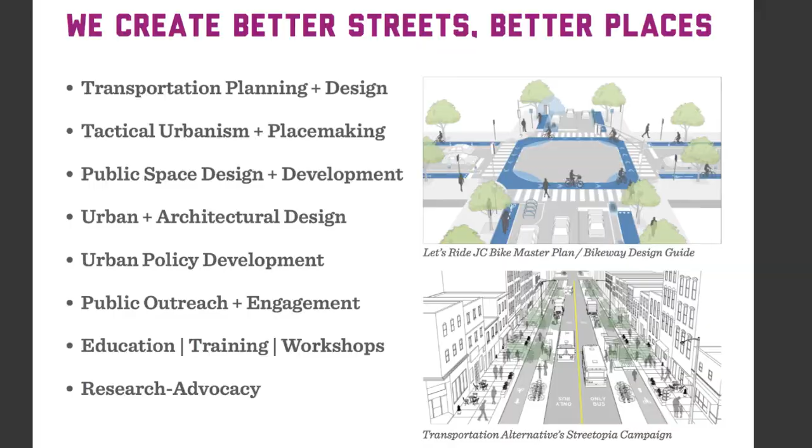Our firm, Street Plans, we are about 9.5 years old now. We have offices in Brooklyn and also in Miami, which is where I started the company with my partner, Tony, who runs our office down there. We do a wide array of project types. We work on cycling and transportation, we work on public spaces, we do zoning and architecture, a lot of research, writing and advocacy. So we're involved with a lot of different kinds of things with many different types of community groups, with foundations, with developer clients, with a lot of mostly city clients. So, we get a lot of different perspectives through our work and through our projects.

I hope you leave this talk this morning with a better understanding of what tactical urbanism is. That's a wonky term, and of course I'm going to explain it more today. I hope you can understand how it can improve the project planning, development, and delivery process. In the end, we're looking to, yes, use short-term projects, but this is about the longer arc of transforming our communities. And then finally, I hope you'll commit to thinking about projects and carry them forward and deepening this practice wherever you can affect change here in Orange County and beyond.

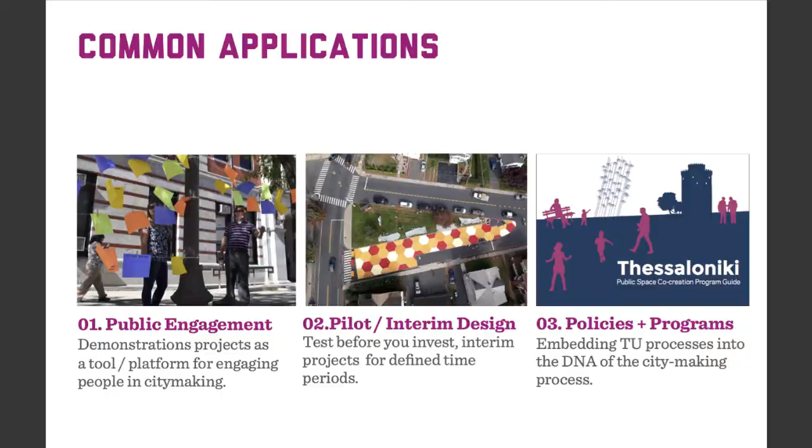Pilot and interim design projects, these are those that are meant to last longer than a few days, but are not meant to be permanent, right? So you want to try something for a little bit longer, really evaluate it in terms of how it's working, what the performance is, getting more feedback from people over a longer period of time. And then finally, policies and programs, as I mentioned. So we're creating these programs with communities around the globe now.

So the benefits are that you encourage people to work together in new ways. It's one thing to be asked to come to a beautiful room like this and listen to a speaker like myself, and then engage in a project, a charrette, a workshop, or what have you. And it's a very different thing to ask people to come out into a neighborhood and physically do something together collectively. That's a very different kind of setting and situation, which we find to be very powerful. We call that experiential engagement.

And then what this does is it helps us uncover what works quickly and, more importantly, what doesn't. So there's kind of a conservative approach built into this where rather than go and spend $100,000 or $1 million or $10 million, let's spend $1,000 or $10,000 first, work out the kinks in a design or a concept, get people to buy into it or not, and find that out quickly and inexpensively before you go and spend 5, 10, 20 years investing in something that in the end may not work.

And then what we're trying to do is deliver public benefit faster. When these projects are successful, we can go very quickly from the very short term to kind of fast track projects because it builds a lot of political will and people can actually see the change and be a part of it. Or in short, this is what we're talking about.

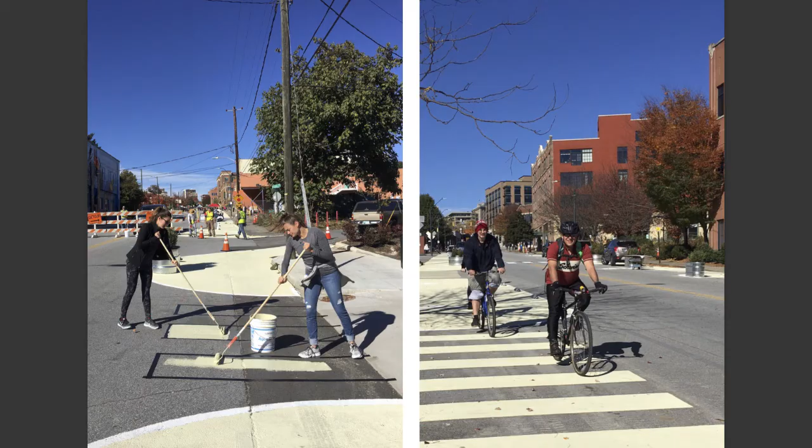We worked with them to get this figured out at scale on an actual urban street. And then the community came out and painted it. So everyone had a chance to really deliver this project, which again, that kind of process tends to be very memorable for people, and people feel ownership over that once it's delivered. And I can talk a lot more about that project if you have questions later.

Number two, start smaller than you think. You may think having a couple $100 may seem like not a lot of money to make a big change, but I'm going to give you a story where that was absolutely the case. This is Hamilton, Ontario. Has anyone been to Hamilton? It's like the Pittsburgh of Canada. It's this old steel city, 500,000 people, fell on really hard times for many decades, but recently has been making a great comeback. And it's in the Greater Toronto region, right on the lake.

And this person that you see literally screwing cones into the asphalt, which I don't recommend, by the way. You get a lot of kickback, but as we say, build, measure, learn. This is Graham McNally, who's an architect in town and relatively young, and he is part of an organization that's called the Society of Architects. And they've been very frustrated. This is back in 2013, by the way.

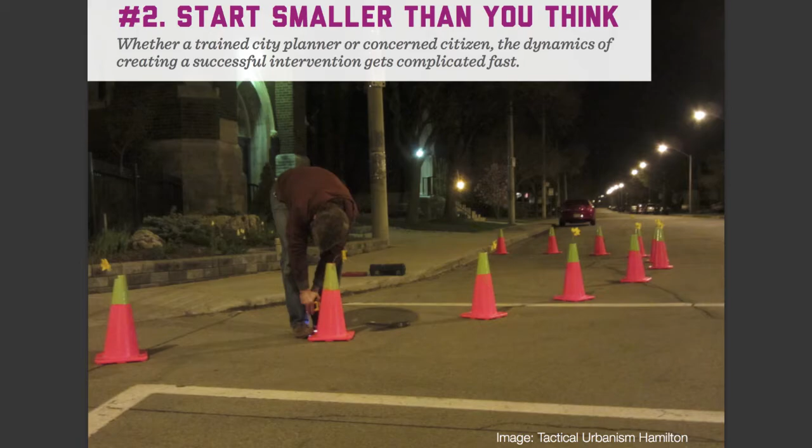We picked intersections such as this, which was made more car-dominated but was in a historic neighborhood, and very walkable downtown streets as well. And this is the result of one of the projects. And so the society gave out these micro grants to 5 ideas that would get developed through our workshop. And they had $5,000 in total funding for the whole thing. And so we thought if we do at least 5, maybe one of them is going to work. So we take lots of little small bets, and maybe one of them is really going to spark.

And that's exactly what happened with this location, which was these cones on one corner in front of the church, and then on the other corner in front of a school. This is a 2-lane, one-way street where, especially at rush hour, when parents are trying to get to work but also drop off their kids, a lot of people speed through the intersection. So it's kind of known to be a dangerous point. When the cones went out, the crossing guard told the press, well, this is fantastic, this is cheap and quick, and it's making a difference for my kids.

We did these 5 projects. I came back to do a talk at a much larger citywide event called Open Doors Hamilton. And at that point, the news media had really picked up on what had happened just about 10 days before. And then once the news article hit, then the city figured out that this stuff was happening, yes, illegally around town. And they were not happy.

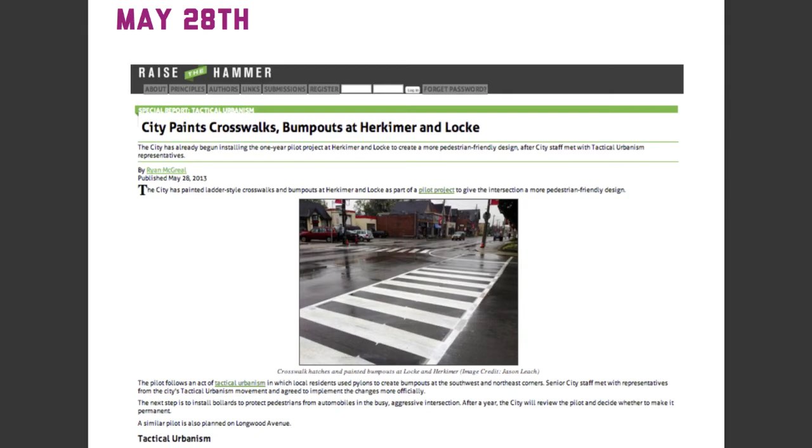And they said, okay, let's start from scratch. Let's rethink this whole situation. Let's take the tense nature out of the conversation and think about how we could actually make this more long-lasting. In 5 days' time, they had gone out to that intersection and created much higher visibility crosswalks, and they put in these curb extensions using just paint and posts, very inexpensive. So you see an image of it. And it was meant to be a placeholder.

And what was really interesting that the city didn't anticipate and the advocates didn't anticipate is that all of a sudden city councilors and other people from every other community who has unsafe streets kind of came out of the woodwork and said, we want that same treatment at our intersections because we have the same kinds of problems, right? And so all of a sudden it goes from being one intersection to they did more than 100 of them in less than 3 years.

So when we talk about a really small little pinprick, a small project that costs a few hundred dollars, rippling through our community and making lasting, scalable change, this is exactly what we're talking about. This is one of those case studies, and it came from people in the community at the grassroots who wanted to see change happen, and it then made its way and filtered up to policy. And it's only the city that has an opportunity to go from the one-off to scale it, and that's exactly what happened.

And now there's been many articles written about Hamilton because they've taken this approach and just run with it in all sorts of different directions, not just about streets and crosswalks, but many other things. You can see here, Canada's smartest city is not Sidewalk Toronto, which if you know Toronto, they're working with Google to create this whole technology-soaked neighborhood, but it's really Hamilton that's doing these kinds of smart things that don't require technology that make a big difference. Or how this planning department is now the envy of many from around the country because they've taken this on.

Lesson 3 is spread the love. So while you saw somebody in the middle of the night go out on his own and basically do this project, that can work, but we don't necessarily recommend that, right? I mean, it can be a powerful force for change, but at the end of the day, you're back at the table with the same people in government, or your community leaders, you're back with city councilors, with other folks, and it's a lot easier actually if you're starting to create a ground game for longer term change to obviously collaborate with lots of different types of people.

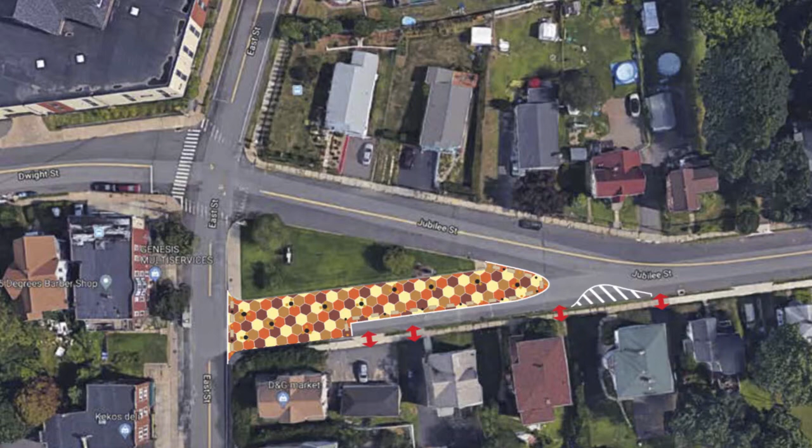And so that's what this project became as a concept, was to turn this into more of a public plaza, to double the size of this little park, and then have the YWCA be able to use this as their outdoor space, because they actually don't have any. So it was kind of a win-win, where we would get a stewardship partner to help manage the space.

And we had to push everything up a day, which meant that we lost almost our entire volunteer base, because this nor'easter was going to slam in Connecticut. If you remember, it was right after Halloween of this past year. So we had to speed things up, and then, of course, the paint didn't show up on time.

So we had ordered the paint in one bulk order from Home Depot. The paint wasn't going to arrive. So now we're really up a creek, and we basically wound up going to 3 different Home Depots, stitching together the paint order, store by store, in an afternoon. And we showed up with the paint.

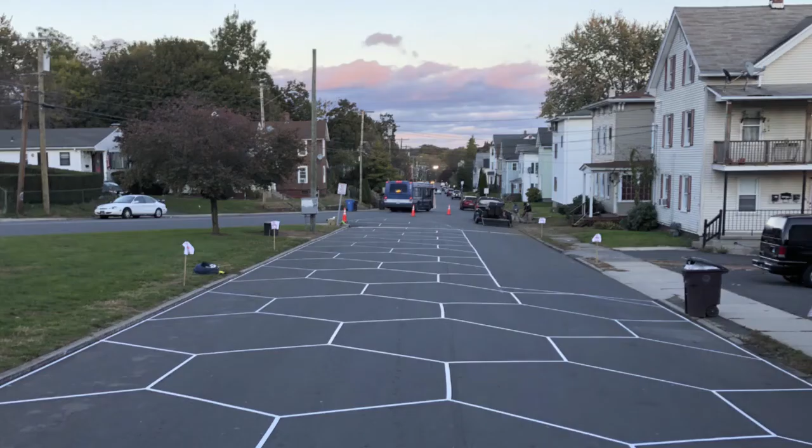We were able to measure out the honeycomb pattern, which was basically, the city's logo is a beehive. So we're kind of playing off of that, and the colors we use are the city colors, and that's the same space. So this is 8,000 square feet. You can see we allowed people to access their driveways just here, but they didn't need all this space, so we doubled the size of the park.

And we wound up getting everyone from the mayor to the public works department to other city employees come out on their Friday. They basically took half a day off from work to come paint this thing with us so we could get it done. And while we typically would rather do this with community members and residents in the neighborhood, the value of doing it with the city was that they thought it was a ton of fun, and they realized that this is not crazy stuff. This actually was well thought out, and it works, and while we were painting, they were all talking about all these other locations around town where they wanted to do this.

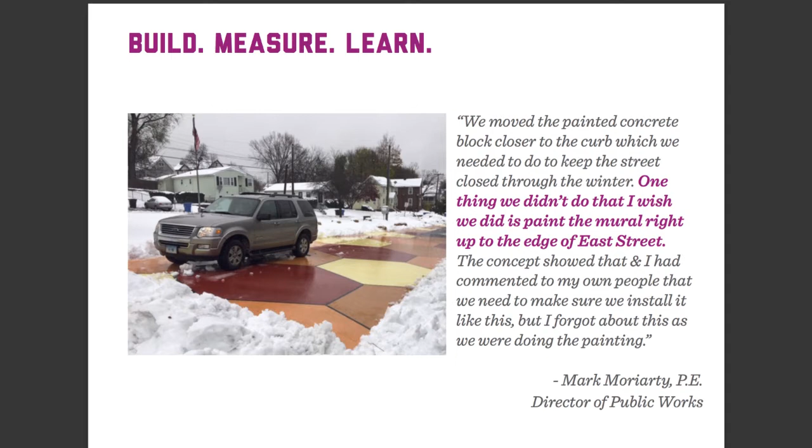Right, and this whole thing cost less than $10,000. There you see an aerial of the space, and then lessons were learned. Right, this is just from an email I got from the director of public works about some of the changes they already want to make to the park to tweak it a little bit. And you can see here, this is the next day. This is his car. He was checking out the plaza after they got all this snow.

City government, though, as much as we love working with cities, they can't do it themselves entirely all the time, right? You need partnerships of neighborhood groups, BIDs, businesses, advocacy organizations to all band together to get things done. This is an example in Norfolk, Virginia, where Norfolk has a pretty severe flooding problem in some of their historic neighborhoods, which were built on landfill over time. And so they're getting water that's seeping up as the ocean rises around them, and they're also getting heavier rain events, which brings water obviously from above.

And so the city is pretty resource strapped. They're one of 100 cities in a network called the 100 Resilient Cities. That's funded by the Rockefeller Foundation. And as part of that, they create a resiliency strategy. And as part of that resiliency strategy, they realize they have to work with property owners to work on stormwater management and retention. And so we worked with the community that's most threatened by stormwater issues to go out and implement 4 or 5 different interventions in one place that would help retain rain.

And so here you can see people depaving the sidewalk. This is setting up rain barrels to collect rain off the downspouts of buildings, off the rooftops. And then we created this branding and programming around this idea and had this workshop where we showed people how to do these types of interventions, and then gave the city recommendations on how to move forward after the workshop.

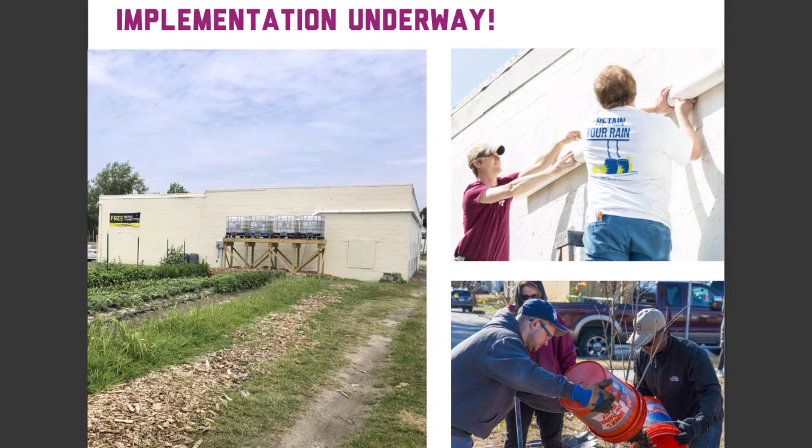And so you're not going to solve their flooding problems overall if the ocean's rising around them, but we can mitigate over time with these incremental interventions, not 1, not 10, but 100, 1,000 start to make a difference when they have a big rain event. So this is where a real city and citizen partnership is working towards a more resilient city in some of their more threatened neighborhoods. So I talked about this briefly, but aligning materials with project duration is pretty critical.

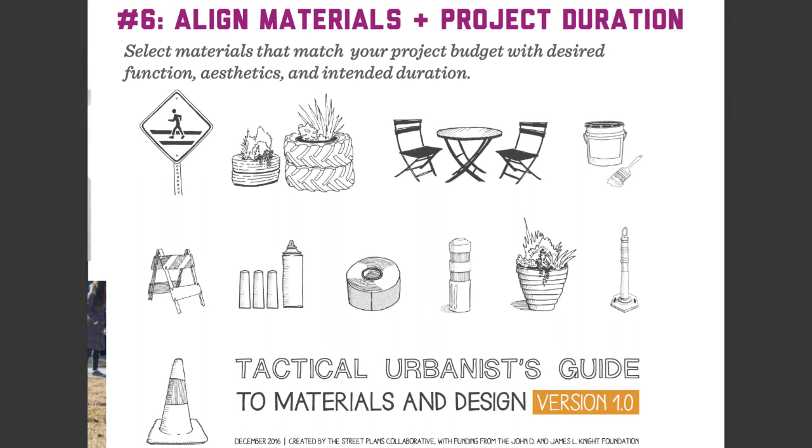So as you go out and do your projects, you have to think about what are your resources, how much can you spend, how long do you want your project to last, and how do you match materials to make sure that you can do that, right? And that's a really key kind of decision-making framework to go through with these projects.

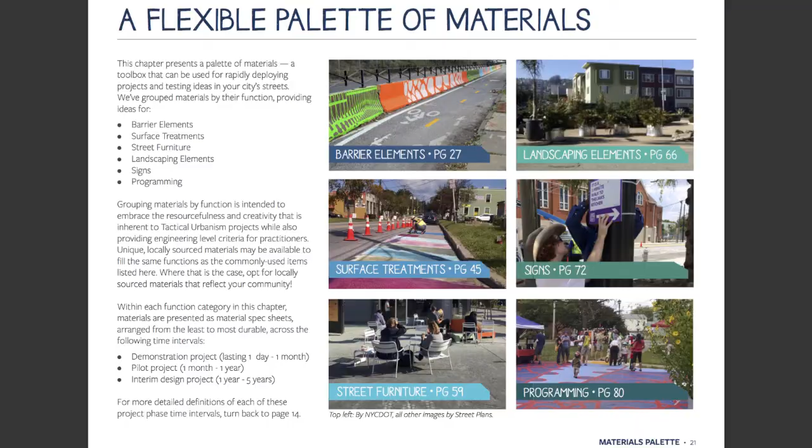Our guide goes through a bunch of different types of project elements and then assigns them to either a demonstration project interval, which is 1 day to a month, a pilot project interval, which is 1 month to a year, or interim design, which is 1 year to 5 years. Okay, and so interim is what we look at when you have a gap between having a successful demonstration or pilot, but then not having the resources to take that next step into permanent construction of something. So it's filling that gap space.

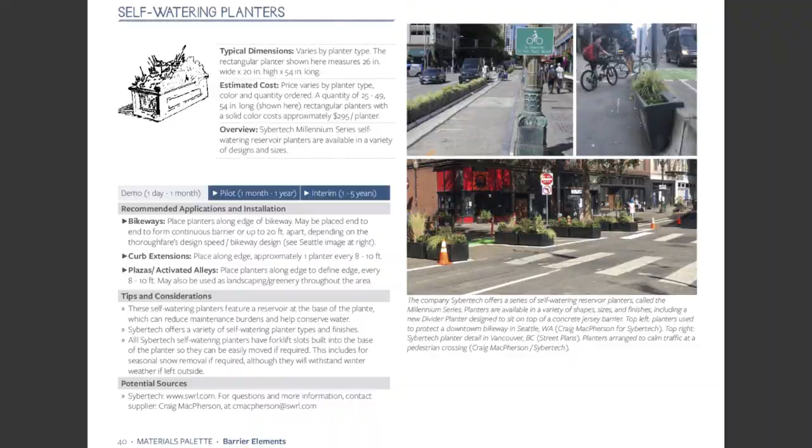So the guide runs through all the materials, the estimated costs, how to apply it, tips and considerations, and then sources. So it'd be really useful for some of your projects. And again, we match the materials to these 3 different timescales or intervals, which then ideally result in long-term capital. And I want you to know you don't have to go through all 3 of these steps to get here. Sometimes you can go from one to the last. You can start maybe even here and go to there. But there are tools and processes and materials that work in these 3 buckets.

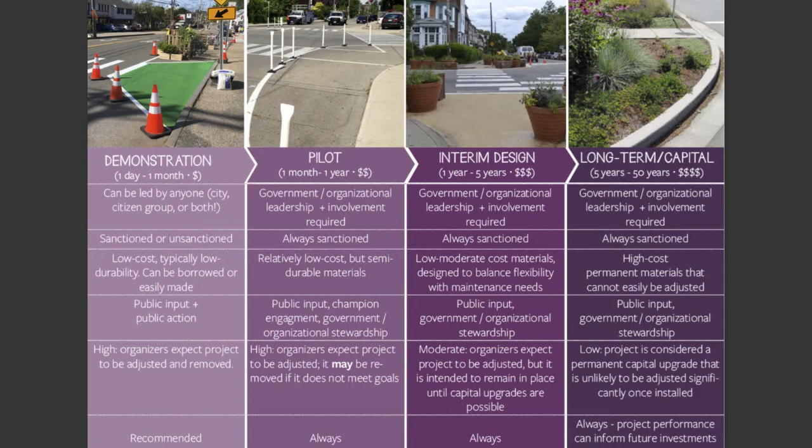And you can see here Burlington, Vermont as a demonstration project example. This is less than $100 of tempera paint. That was a sidewalk extension for an event where 10,000 people get crammed onto about 4 blocks for an art festival on these 5-foot sidewalks. So this was being responsive to that need with a very light touch that created space for people to gather and eat food from the food trucks during this big event.

Burlington also has passed a pilot project process where they test materials. So this whole effort was part of our outreach for a bike and pedestrian master plan. This design was a road diet going from 4 lanes down to 2, and they were testing different materials. And this was a 1-year pilot to see what the feedback was from the community, to see which barrier element they liked more, the one that's more visible but ugly, or lower, less visible but maybe less ugly.

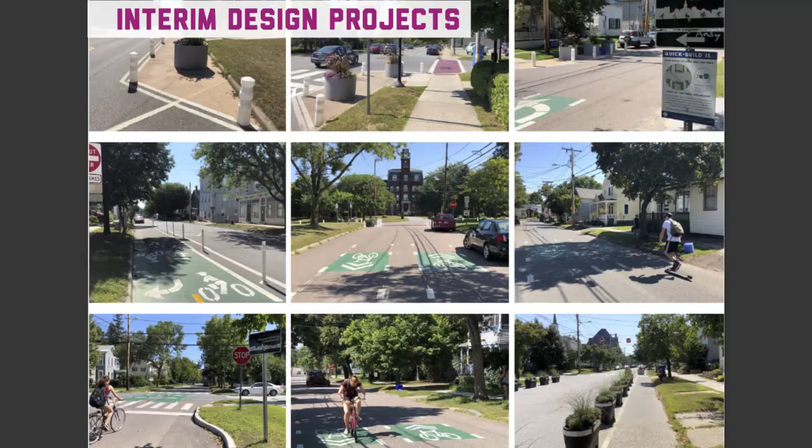And then that has led to this program we developed with them for interim design, right? So these are projects that have come out of our master plan and bike plan with them that use an interim design toolkit. So things that will last for several years, but are not meant to last for 5, 10, 20 years, right? You have to refresh them or hopefully invest in more permanent infrastructure.

So I'm showing you these images because there's 3 different types of examples. As a community, you can put these processes and these materials to work for those reasons. And a lot of this lives in this guide that we created. You can download this off their website. It's design standards and material standards for what we're calling quick build projects.

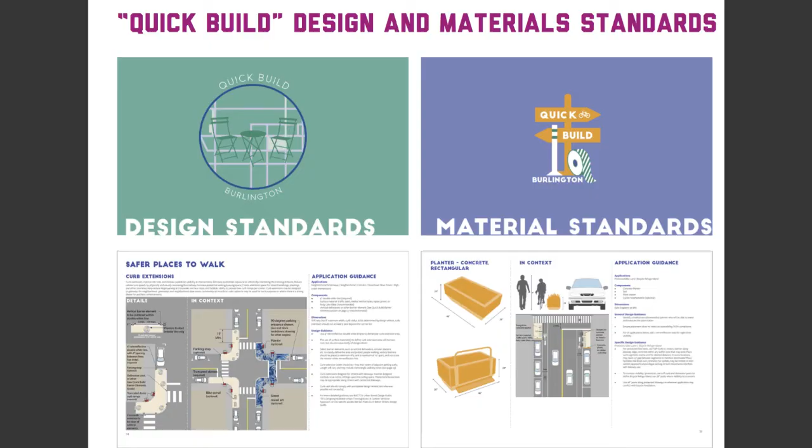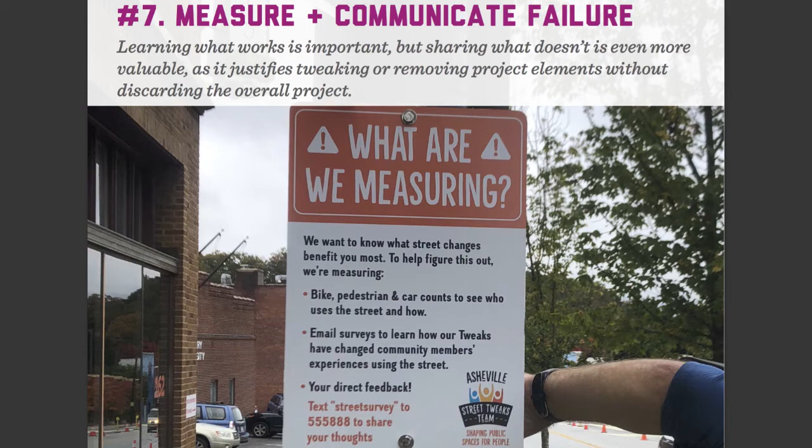Measuring and communicating failure is probably as important as communicating success. This was from that Asheville project. So remember, the intent of this was to last for 6 months. And within 6 days, this is what the paint started to look like. So we had a massive material failure from that big, beautiful project I showed you earlier.

And the lesson learned here was that the manufacturer of the paint, which we had worked with before, told us we could put the paint down at temperatures as low as 35 degrees. When we installed this in the fall, it's Asheville, it's in the mountains, it was chilly, it was about 40 degrees. They'd also come off of a week of rain, so there was a lot of moisture in the ground. And what wound up happening is that after we painted the asphalt, it started to crack, chip, and come up.

And so this was such a big project for the community. It took 65 people, had the bike advocacy organization's name all over this, their reputation was on the line, and this became a severe challenge. I can finish that story later. In the end, it all turned out fine, but these are the things that you come up against, and you need to be able to prepare for failure.

That Biscayne Green project, we had over 23 days when it was live and available for use. We had more than 20,000 people. And we did a lot of evaluation and measured a lot of data related to the project. And we learned a lot. For example, we had far more men in the space. 59% of users were men versus female.

So if we're going to design this to be a park and a public space long term, we need to design for gender parity, right, to match the demographics of the city. So how do we do that? Well, that's now a question that can inform the next design process, where you can start to really think about the activities, the programming, the design elements that would be more inclusive. So that's why we, again, do these projects, so we can learn this type of information so you don't design and build something without that knowledge.

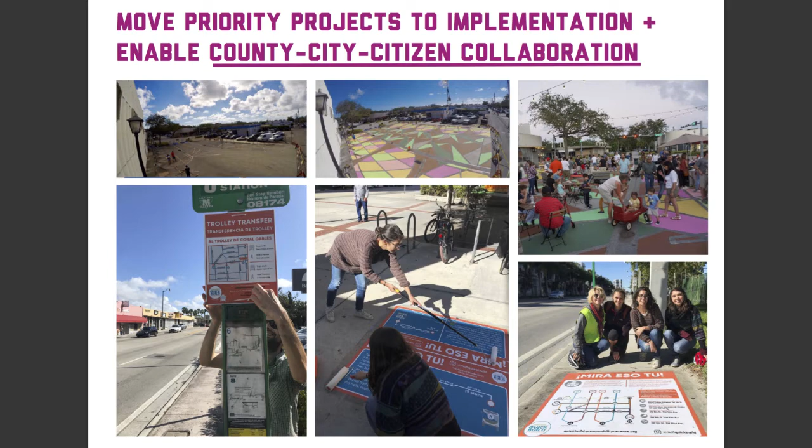And a big focus of this was access to transit. So getting people from neighborhoods or main streets onto the bus system or onto the rail system, and making those spaces safer and more intuitive, and more public space around those stops and stations. So again, 18 projects. We're taking little bets. We're trying to find a couple that will be a huge success. We're still implementing the program, but this one so far has been a huge success.

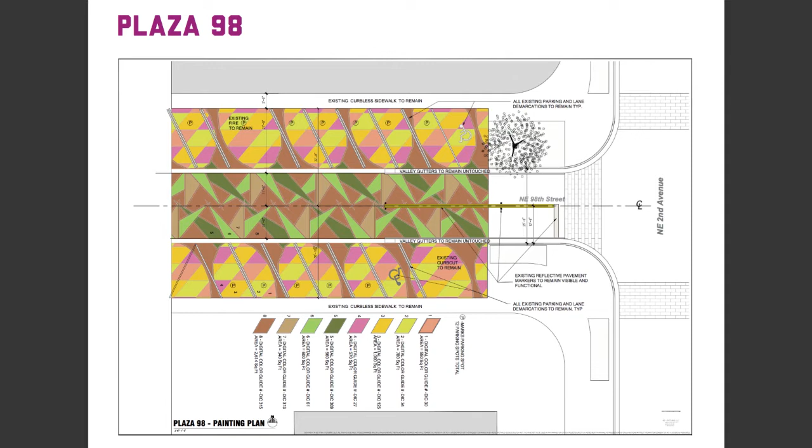This was put forth by a local business group in a village called Miami Shores, which is north of Miami, and they wanted a gathering space in their commercial center where they didn't have one. So what we did was we painted this beautiful mural on the street, which a few times a month is used like this, but otherwise you can still see the lines on the ground here. It's used for parking. So it can be a very flexible space that's public for parking when you have that demand, but also you can close it down, this half block, and make it a plaza, and it's next to one of the busiest bus lines that runs up and down Northeast 2nd Avenue. So that was kind of the connection to the transit piece.

Reinventing this, creating this process, even though Miami-Dade County has been our client on this, working with them has been extremely challenging. So we had to get the politicians to create a resolution to basically help us streamline the work that the county wanted us to do. It's a very odd reality, but it's where we've been.

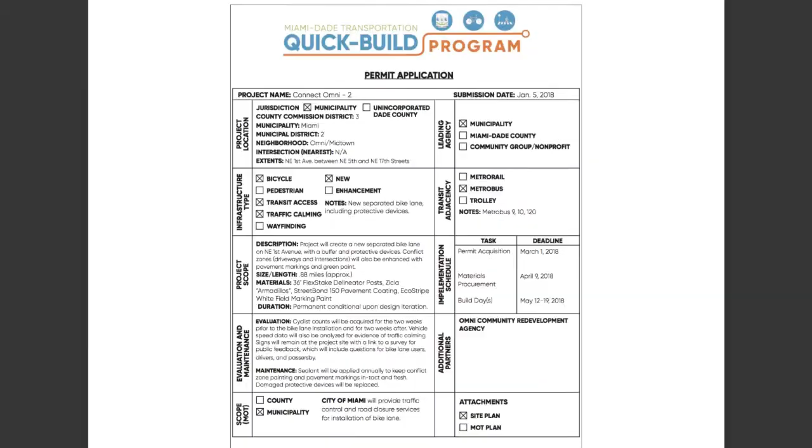So now there's a much easier process where you can do these projects more long-term, and you don't need street plans necessarily to do them. And that's the kind of thing we're trying to leave behind in different communities.

So the future of this movement is that, programs and policy. It doesn't sound sexy, but ultimately if we're going to get to scalability and have this be part of practice, we need to do this kind of work, which we're doing, as I mentioned, all over the place. And creating these very simple, easy to understand processes, more complex for government, much simpler for citizens on the steps you need to take to get permission.

9 to 10, we're almost done here, guys. Thanks for your patience.

If you build it, you've got to steward it, right? You've got to maintain it. And so thinking about that before you build something, even if it's going to last more than a couple weeks, is really critical. Even just a month-long project, you got to think about who's going to pick up the trash, who's going to clean the space, who's going to program it, who's going to put out the chairs, bring them back in at night. Those kinds of decisions need to be thought before you implement, not after.

And so we see a lot of community partners and advocates go out and have tons of energy and excitement, which is wonderful, and then go do these things, and then they don't think about this piece to it, and then pretty soon it starts to kind of fall apart. It doesn't have someone to take care of it, and all of a sudden that becomes a maintenance liability and a challenge for the city. So just be aware of that, right?

And so we've developed this guide for the city of San Francisco, which is really just a best practice look at everything from very low-resourced, low-cost, community-led events, on up to partnership models, to public-private partnerships, to special assessment districts, and then technical assistance programs, looking at all the different characteristics of public space and how to manage and steward those things, even from the very temporary one-day kind of thing to more permanent places.

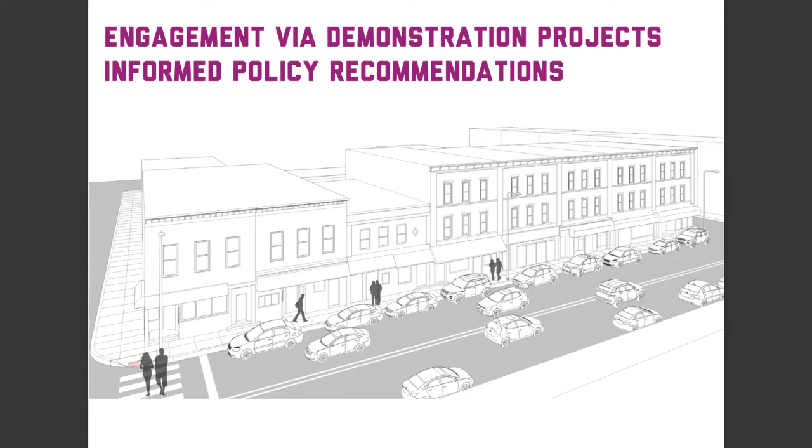And so we got a lot of feedback from these walking workshops. We were able to show the city how the geometry worked and how the materials worked. And then it led us to create policy for them that will help them have a lot more options on the curbside. So Jersey City is a very dense, very walkable, transit-served place, but they don't use their curbs maybe as efficiently as they can.

So you can park 9 or 10 bikes in one space, right? So we're looking at not all these things on one block, but all the elements that can be curbside that can add value to walkability and to adjacent businesses and properties, like public space, transportation things like floating bus stops to make bus transit run better, to delivery and ride-hail stops. So if you have a delivery zone, maybe that's used from 7 to 10 in the morning, but maybe that can be a ride-hail stop on a block for the rest of the day.

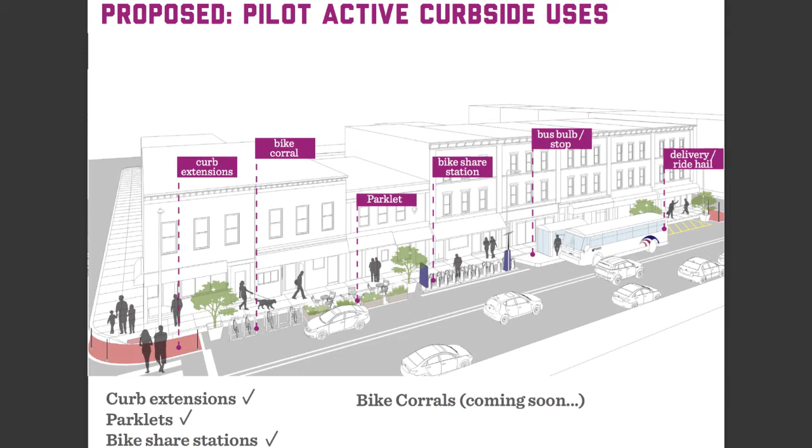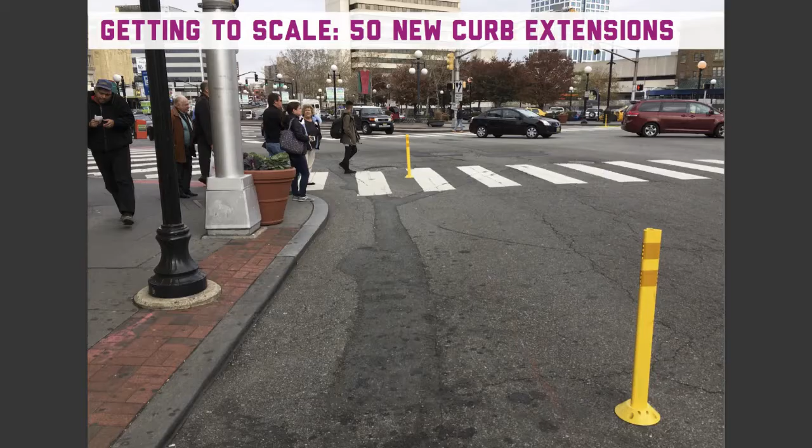So you just know to walk to that spot, or the person who's trying to pick you up doesn't have to double park to wait for you to come out of the business or the home, that they actually have a space that's curbside, and they move on and off the curb very quickly. So we're trying to get these kinds of policies and programs in place. So again, our work is about scale and getting to scalability.

So the city took this idea, which we implemented with traffic tape, plants from Home Depot, and tempera paint. So just a couple hundred dollars per intersection that we spent, and they created 50 new curb extensions on those streets and many other dangerous intersections as well. And so why these matter is they shorten the crossing distance for pedestrians and make people more visible when they're the most vulnerable, when they're trying to cross the street. And turning cars hopefully will now see them more. So they've done 50 of these just in year 1 alone.

And then project 2 of them has been creating this bike and pedestrian master plan. As we've been creating this over the last year, scooters and e-skateboards and all these new modes of transportation have popped up everywhere. It's been that quick. And so we want to try out a design that was intended to be inclusive of a much broader audience. So while we're doing a bike plan, yes, we want to think about ways to design the infrastructure to be more inclusive of a wider audience of people, which is why this lane is 75% wider than most lanes in the city.

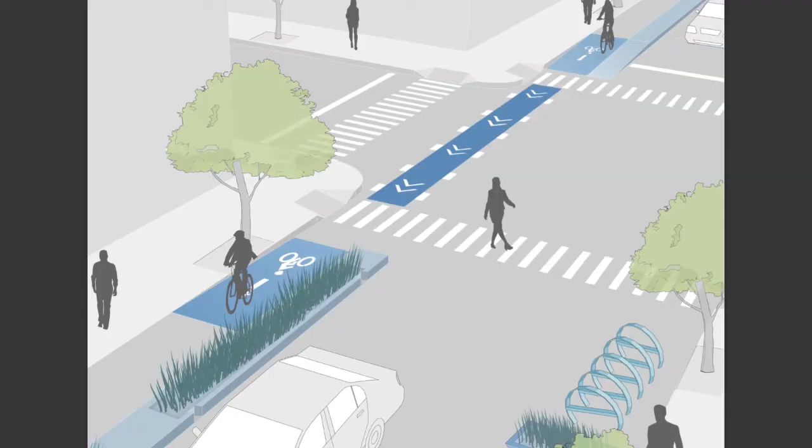And when we tried this out for 4 days, we got, as intended, a lot of people off the very congested sidewalks and into the street space where they were safe, and it made the sidewalks more pleasant. Lots of positive feedback from that, and we're using this to inform our designs for their Bikeway Design Guide, which will have a whole chapter on integrating other forms of mobility, we call micromobility, into what looks more like bike lanes.

So we've learned 2 important things, that city departments, organizations, community groups are really hungry for a new way to deliver projects. But to do that, you need new tools, new materials, you need policies and programs, and to think differently about project delivery. And so putting that into play is really critical work in the mid to long term.

So the next steps for us is we're working on a bunch of new reports and studies, which will be coming out soon, on tactical transit, so how to speed up and make buses more accessible, on the art of asphalt, which will be all about color and how you apply color on streets. And then volume 2 of the materials and design guide will also be coming out soon with a bunch of new materials we've used of late and case studies.

So we do this work because the brain tends to remember 10% of what it reads, 20% of what it hears, but 90% of what it does or what it simulates. So we're really doing the 90%. We're trying to really simulate this change so people really can grab onto it and run with it in the end. So with that, thank you very much, and I will take, I think, some questions.

Hi, my name is Rachel Lucy. I'm from Goshen in the Village. My question for you is, how do you deal with funding as a private citizen advocating to get these projects to go ahead? For lots of grants, you have to have the banking in place for if you do get accepted, that funds has to go somewhere and then be spread out. So what would you suggest?

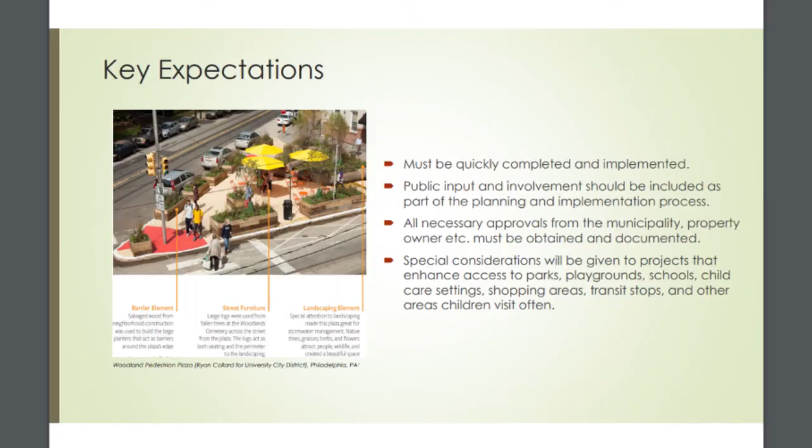on currently. So the objectives of your planning and implementation process for these projects, as I said, would be to engage the public and help the public guide what type of project is implemented. We want to see what your short-term and long-term goals are. As Mike talked about, you might be doing something as a pilot project that will eventually turn into something more permanent for the community. We would like you to work closely with local state officials and to follow all accepted engineering and design principles and safety protocols. We don't want anyone getting hurt.

And it's great if you can integrate, as Mike talked about, the project in Norfolk, Virginia, where they integrated education into the project, where they showed how planters reduce runoff after a rain. So those kind of things are wonderful. And if you can, don't be intimidated by this, but if you could provide some before and after data, as Mike talked about. Maybe you can go out and do informal surveys just to see how people perceive the project. Has it increased their level of happiness as they're walking around the space? Or you can simply measure the flow of traffic with an inexpensive radar gun, something like that we'd like to see.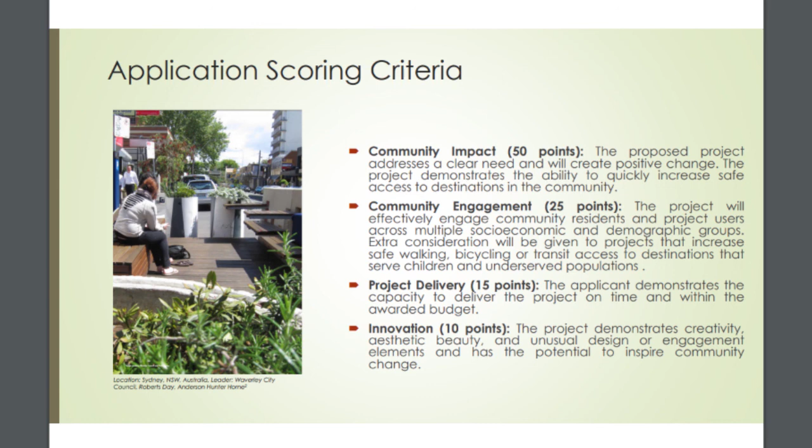For the application, the scoring criteria, you can read this. These are the categories that we think we'll be looking at. Obviously, we want to know the community impact, and then also the community engagement. We've been talking about that all morning. The project delivery, we want to make sure that it's not too large of a project, that it's something that you're actually going to be able to implement within the time frame that we've outlined. And then also innovation. We want to make sure that it's a project that has a lot of creativity and that will really inspire the people that are using it.

Yeah. Again, we just want to say thank you to Mike for being here today. We hope that this has kind of started to spark a lot of interest and ideas for everyone.